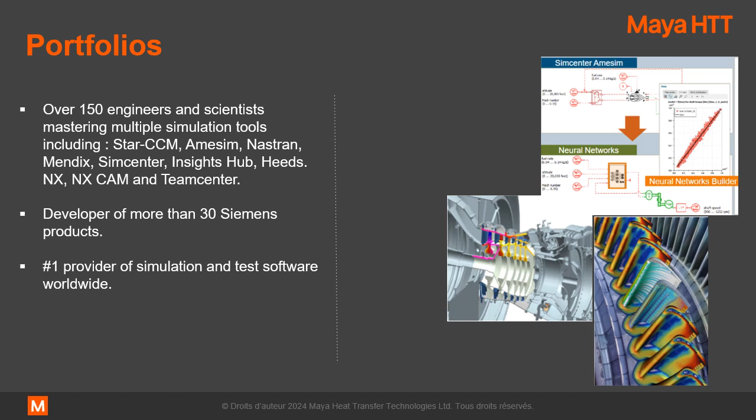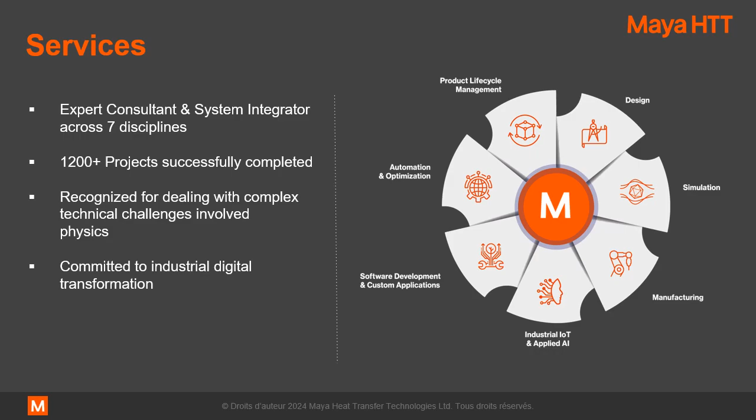Our team comprises over 150 engineers and scientists mastering multiple simulation tools and domains, including some of the following you see here. We are a developer of more than 30 Siemens products, as well as being a provider of some of the simulation and test software worldwide. We are expert consultants and systems integrators across 7 disciplines that you see here, with more than 1,200 projects successfully completed. We are recognized for dealing with complex technical challenges and involved physics, and we are committed to industrial digital transformation across many sectors. And now an update on what's new in some of the Simcenter Amesim libraries.

Aerospace and Marine. The first update is for the centrifugal compressor pre-design app, which is new to the 2404 version. It allows users to compute flow path and weight of centrifugal compressors and allows for the visualization of the centrifugal compressor layout. It will allow you to de-risk the design and integration of centrifugal compressors while assessing things like the weight penalty of a given design and being able to extract information to assess the engine transient behavior.

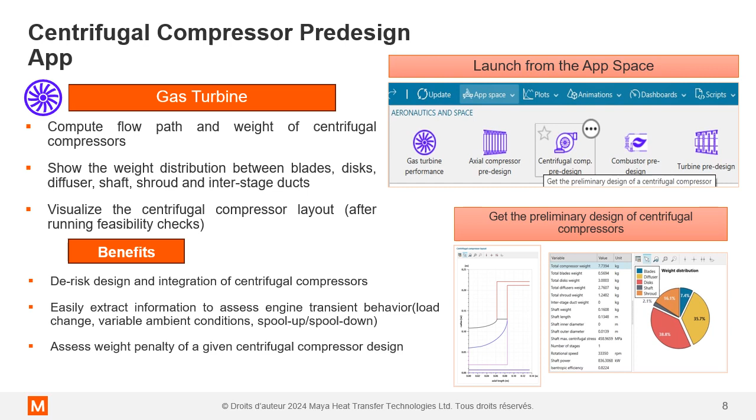The next update is the inclusion of a new marine generic sensor, which is able to be placed anywhere in the model and can sense data related to the water, the wind, and the ship performance for a marine ship model. The benefits here are that it can greatly speed up the implementation of a control strategy model in your system simulations and allows you to get a better assessment of any part of the overall ship performance model in your analyses.

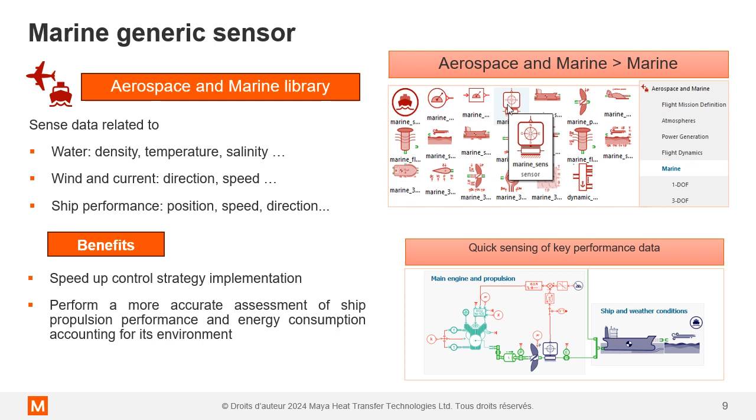Another new addition are the single and coaxial rotors found in the Flight Dynamics sub-library for aerospace and marine, which allows you to model simple and coaxial rotors as it states, which will account for things like flapping effects and cyclical pitch control dynamics. This allows you to design different rotorcraft and autopilot modes for those rotorcraft more quickly and more accurately model the dynamics, allowing you to do things like assessing power requirements and accounting for the environment, as well as these rotorcraft can then be placed on Earth or Mars or otherwise.

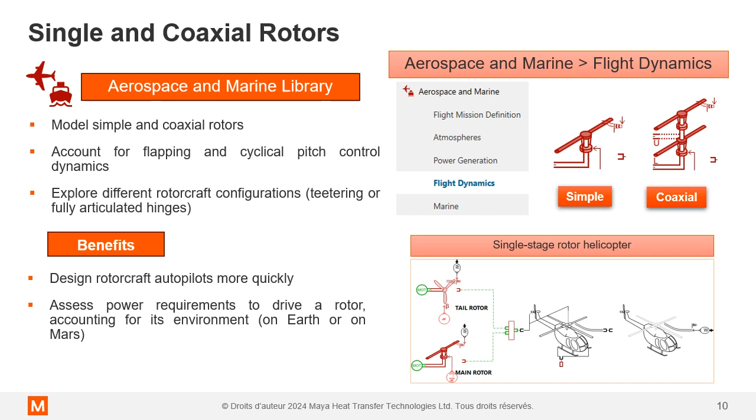Next up is the fuel cell library with specific updates for proton exchange membrane type fuel cells. A new capability for the PEM fuel cell models in 2404 is the handling of the startup and shutdown sequences. So for dynamic simulation, a new capability has been added to handle those startup and shutdowns, where we can track hydrogen concentration at the anode and look at the resulting cell voltage.

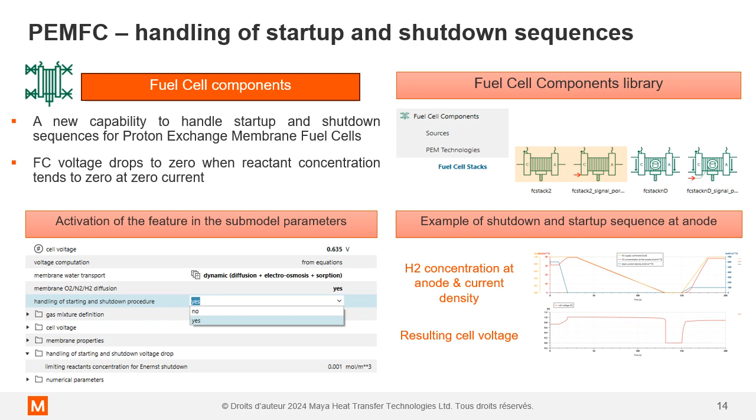The parameter identification tool has also been enhanced for 2404, allowing an improved operation for the app that allows you to preview results coming from the loaded CSV and being able to monitor in real time the convergence process that is the optimization of parameter identification within the app. We now also expose additional parameters that you can identify via the app for characterization of the fuel cell.

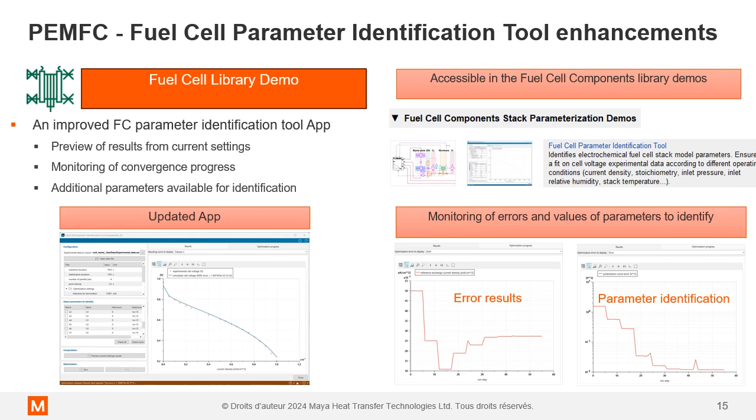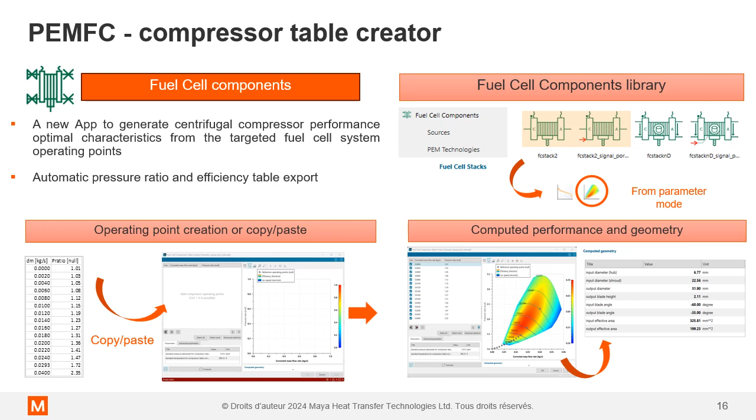A new app has also been created for the characterization of a compressor performance table. Using data that will come from external sources, we can copy paste this into the tool and generate the performance map and resultant geometry of the compressor for the fuel cell.

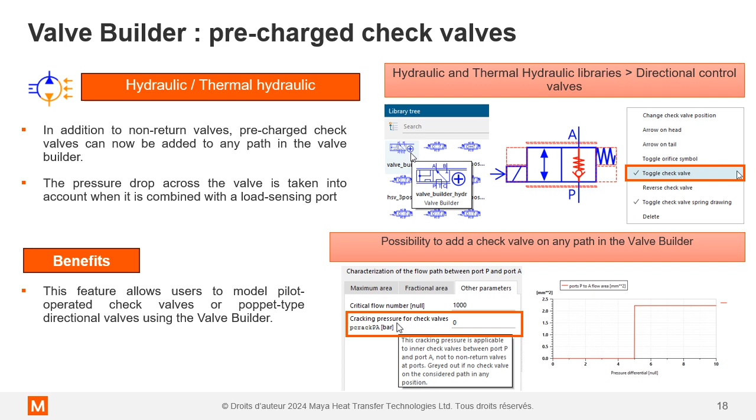Another improvement is in the gerotor pump CAD import capability, where we have the ability to toggle on or off viscous friction calculations and the associated geometrical considerations for that type of analysis. So this improves the accuracy of the gerotor pump modeling using the CAD import capability and gives us a wider choice of parameters to be able to refine the model to our specific application.

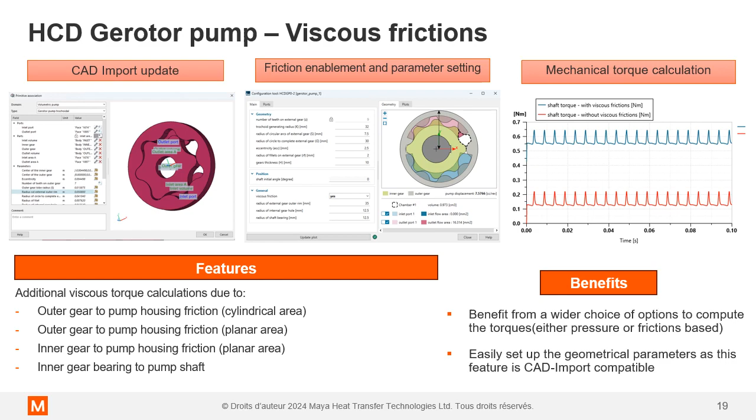Next is the thermal library.

A big new improvement in the thermal library is the inclusion of an enhanced fin heat exchange element that makes the modeling of the fins for heat exchange much easier than in previous versions. The element has been moved from the two-phase flow library to the thermal library to make it more accessible and modeling much easier, allowing you to reduce the number of components overall to model heat exchange across fins.

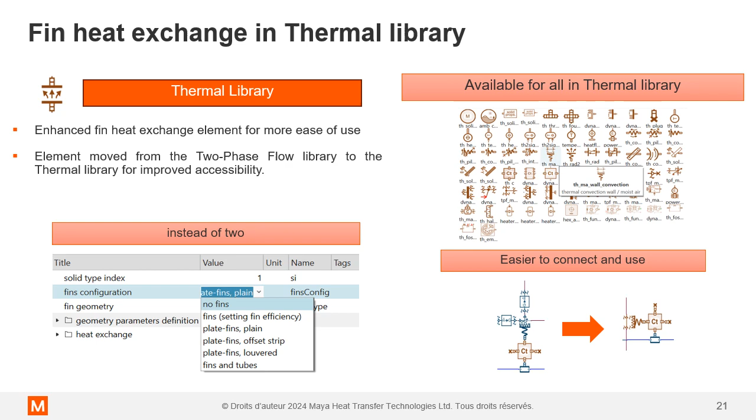In addition to reducing the number of overall components, the modeling has been simplified with more accessible parameters in one component and an app allowing you to simplify the process of geometry setting. Overall, this has accelerated the process of modeling fin for heat exchange in the thermal library.

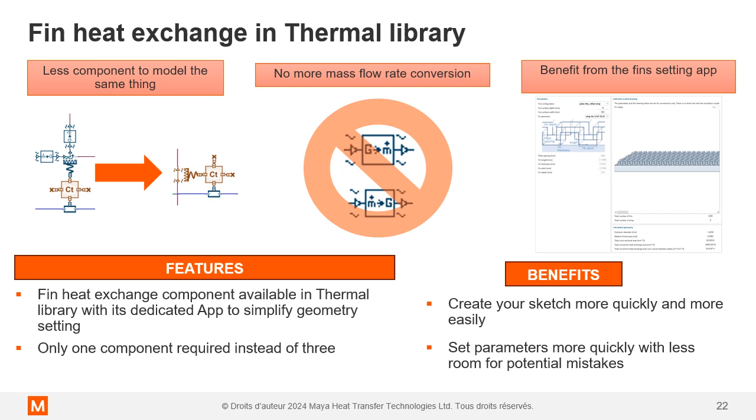Finally, we see here a comparison of modeling the same type of heat exchanger with fin surfaces for heat exchange. On the left, the previous version using elements from two-phase flow, and on the right, the newer version that's using the more refined thermal library version of the heat exchange across the fins.

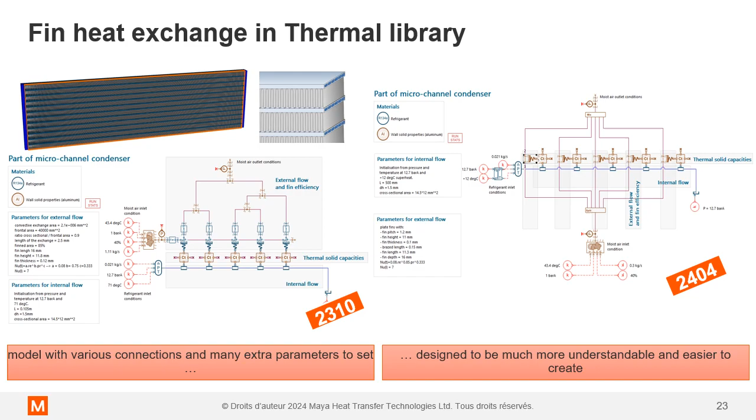Improvements in the two-phase flow library.

Improvements have been made to the two-phase flow compressor mass flow rate correction in the two-phase flow centrifugal compressor component. This allows you to characterize the compressor more independently of the tested fluid.

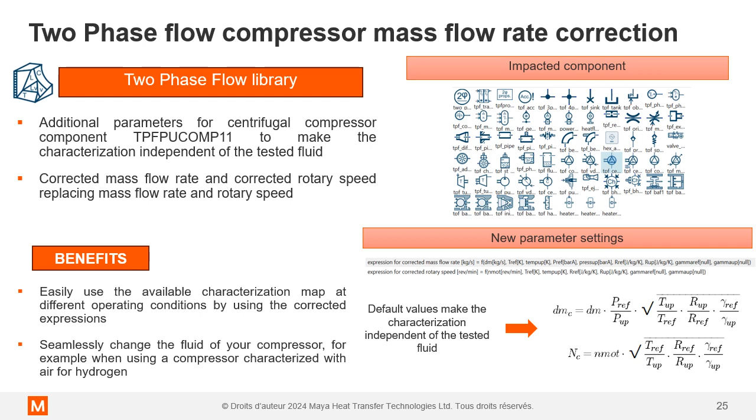So this means that there are now corrected mass flow rate and corrected rotary speed parameters that allow you to update the characterization for a new fluid, for example, changing from air or hydrogen to one or the other, making the process more streamlined and more straightforward when working with test data from one fluid and characterizing for another.

Another major improvement is to the mass flow rate correction that's now available for the slip ratio definition for the two-phase flow library. Previously, we were able to choose different correlations for the slip ratio between the liquid and vapor phases of a fluid, allowing to model the different velocities.

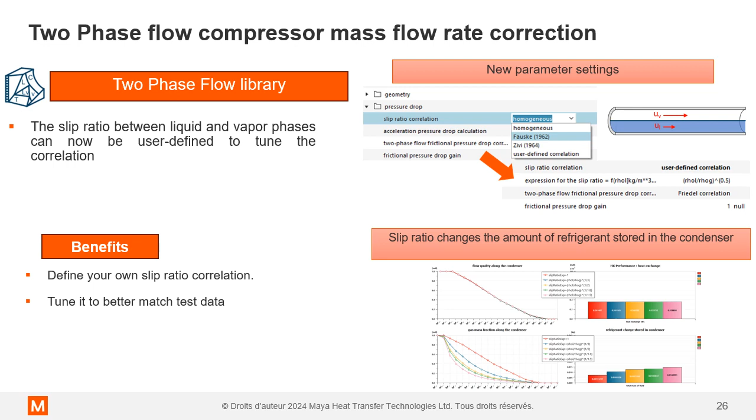But now we are able to include user-defined correlations for further tuning and allowing better accuracy for that correlation and better matching of test data.

And now for what's new with the Simcenter Amesim platform.

So the new 2404 version brings solver changes and some optimizations to the solver, mainly better handling of large Jacobians and a refactoring for some of the two-phase flow material calls and other parameters that generally are improving the simulation performance and significantly so for larger models.

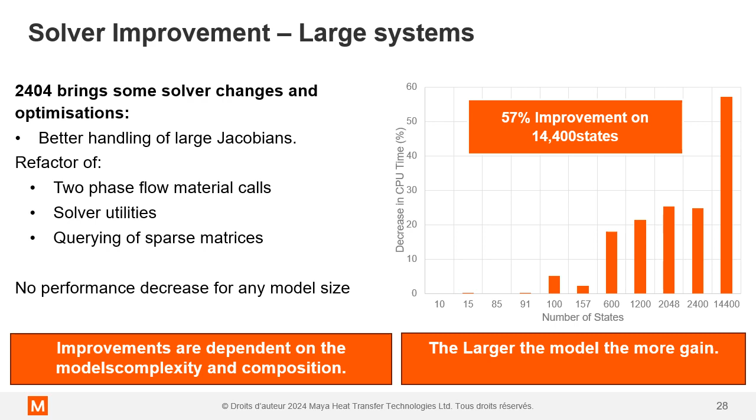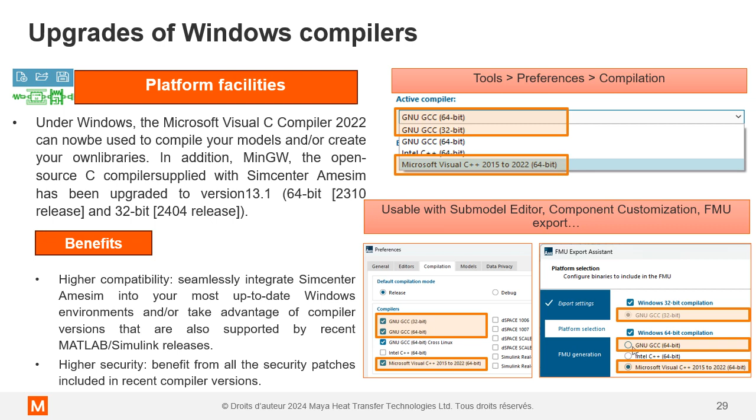Mainly, this means there's more compatibility with other tools across compilers, allowing you to take advantage of things like co-simulation with MATLAB Simulink.

There have been some modifications to the analysis toolbar in Simcenter Amesim 2404, mainly that there is now a container to list all of the plots that have been attached to the model using a tile view.

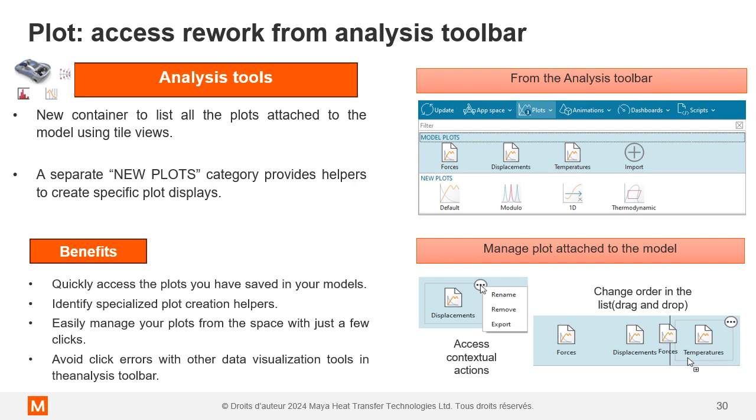So this allows you to separate new plots and to reorder different plots within your simulation simply by using a drag and drop. So this easily allows you to access the different graphs and plots that you've saved to your model and identify more specialized ones that you might have and access more quickly.

The ability to add more metadata to the CSV export has been included, where now we can attach things like model name, variable description, and result set number to the exported CSV data, allowing you to have more context working outside of Amesim with the results that have been exported from a simulation.

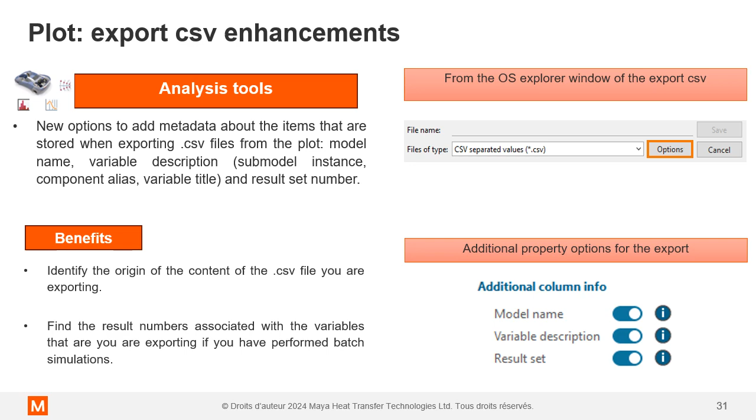In the CAD import domain, a new ability to import a model with 3D mechanical components now allows you to use the recursive method to do so, which allows us to avoid the error-prone manual process for getting frame positions and orientations of the different bodies, and be able to use the recursive method more widely across applications in the 3D mechanical library, which typically eases the process of modeling for this library.

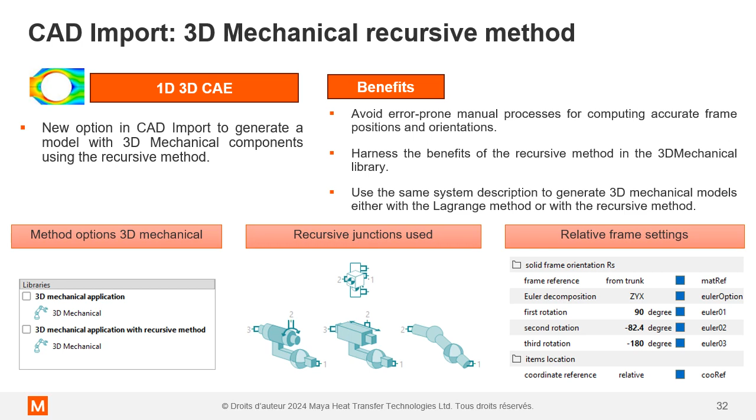And here we see an example of that in action with, on the left, the 3D CAD model of the mechanism that we wish to import, and on the right, the mechanical model using the 3D mechanical library across Amesim, leveraging those recursive joints and the kinematic assembly that is created within the Amesim animation pane.

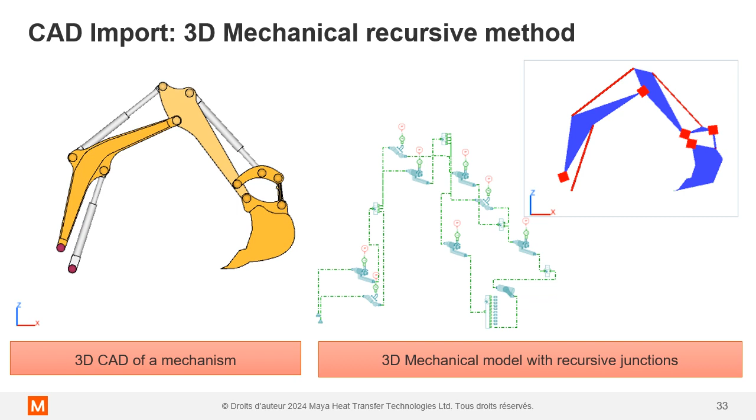And that takes us to the end of today's session covering what's new in the 2404 version of Simcenter Amesim. Thank you very much for your attention.